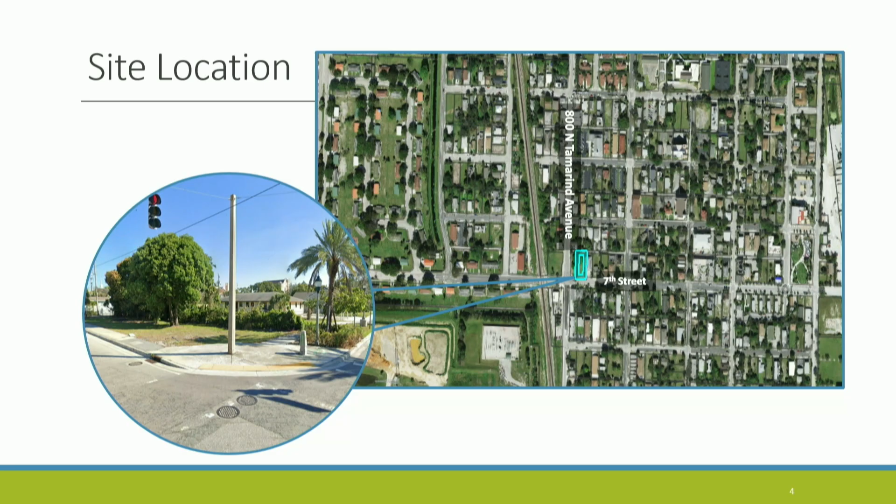The project site is located at the northeast corner of 800 North Tamarind and 7th Street. It's a 0.13 acre parcel in the downtown master plan with a land use of UCBD, and zoned in the Northwest Neighborhood District, more specifically NWD-5.

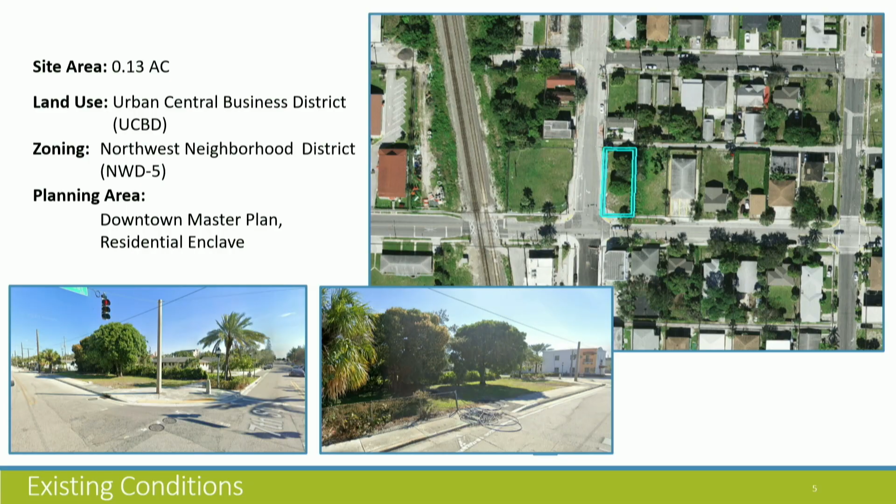The parcel itself is currently vacant. It is abutted on the east and west by vacant parcels, on the north by a single-story professional office building, and on the south by a 2-story building utilized by the City of West Palm Beach Police Athletic League. All of these parcels are also zoned in NWD-5.

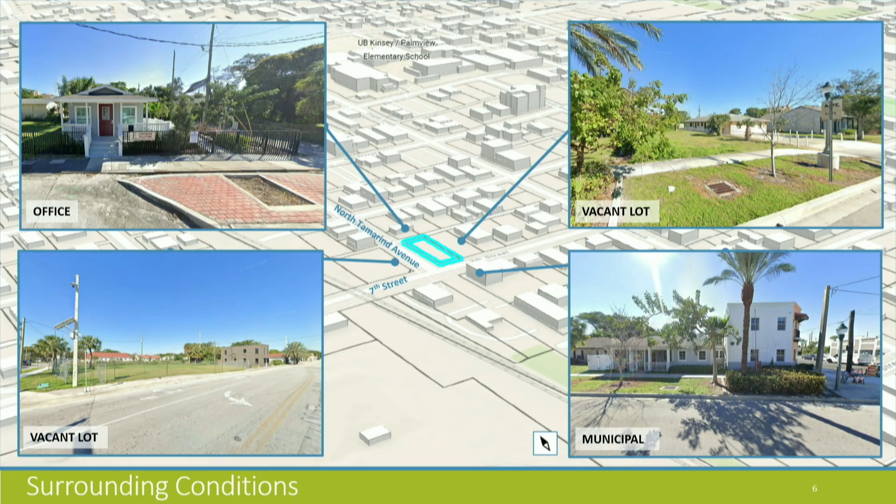The project is within the Northwest Neighborhood District, and based on Section 24-128 of the zoning code, the intent of this district is to preserve its historical character by providing appropriately scaled infill housing, enhancing the Tamarind Avenue corridor, improving neighborhood connectivity, promoting pedestrian activity, enhancing that streetscape feel, maintaining a low to medium scale and character, and being consistent with the historical architectural character of the area.

This project delivers on that by providing a 2-story mixed-use project appropriately scaled for the area. It adds additional residential units in the form of 6 studio-style micro-dwelling units, as well as 2,200 square feet of first-floor office and 3 tuck-under parking spaces on the north side of the building, screened from visibility from the right-of-ways.

This is the site plan and ground floor plan of the building. As you can see, we have those 3 tuck-under parking spaces accessed from the north alley. There is no additional curb cuts along Tamarind or 7th Street. The tan portion of the building is the finished office portion and back-of-house aspect of the building.

You can see that the streetscape is being enhanced through additional landscaping. We're also providing site furnishings in the form of bike racks—this plan is oriented north. In the southwest corner of the building there are 4 bike racks, and along the frontage on 7th we've got additional site furnishings in the form of a bench and trash receptacle, which really lends to activating that street frontage.

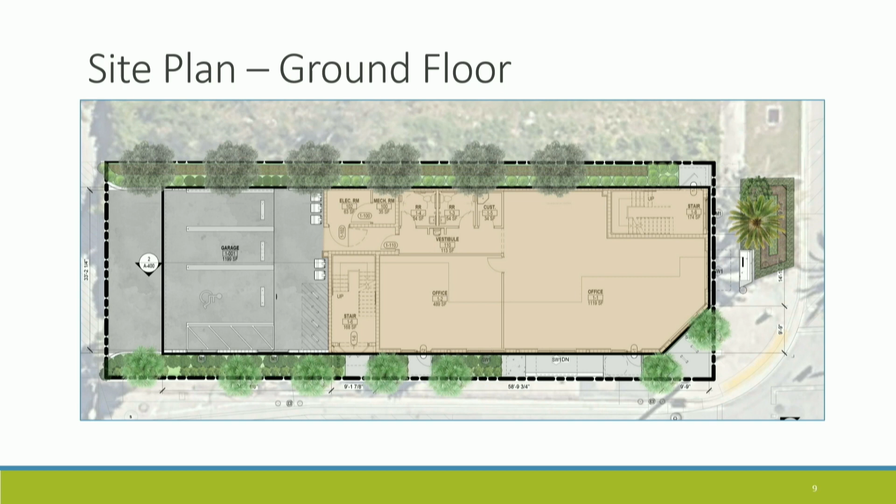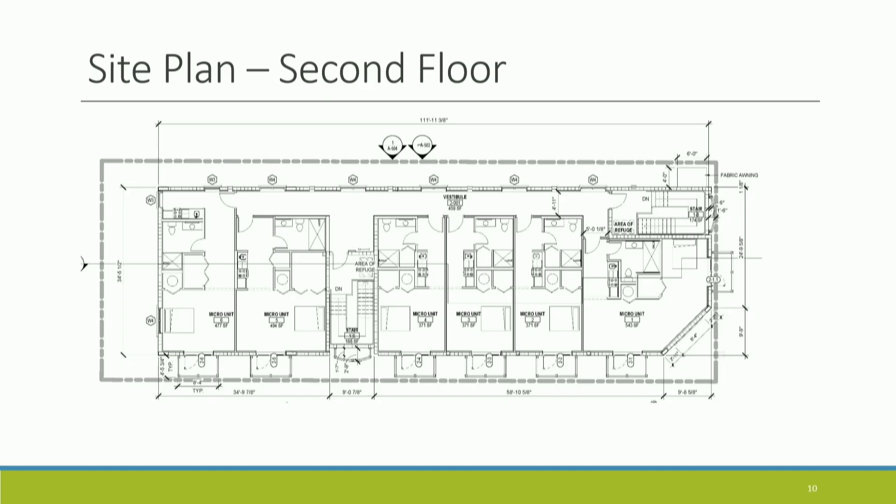This is the 2nd floor plan of the building, which reflects those 6 studio-style micro-dwelling units. The next 2 diagrams reflect the FAR calculations and active use liner for the building itself.

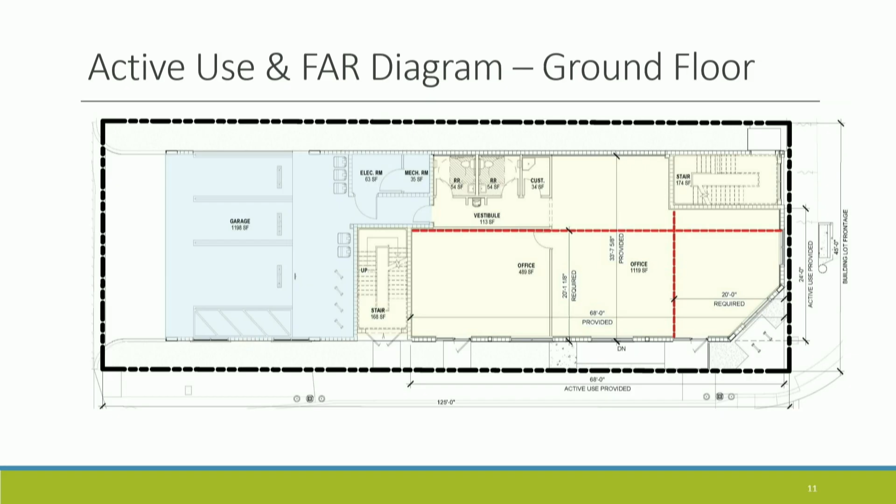The tan portion is what's calculated in the FAR. The Northwest Neighborhood District 5 allows for an FAR for a project site like this of 2.75. The project as currently proposed only proposes an FAR of 1, which is part of scaling this appropriately with the neighborhood and being consistent with that residential character.

The FAR, or active use liner requirements, will come into play a little bit with one of our variance requests, and I'll go over that in greater detail.

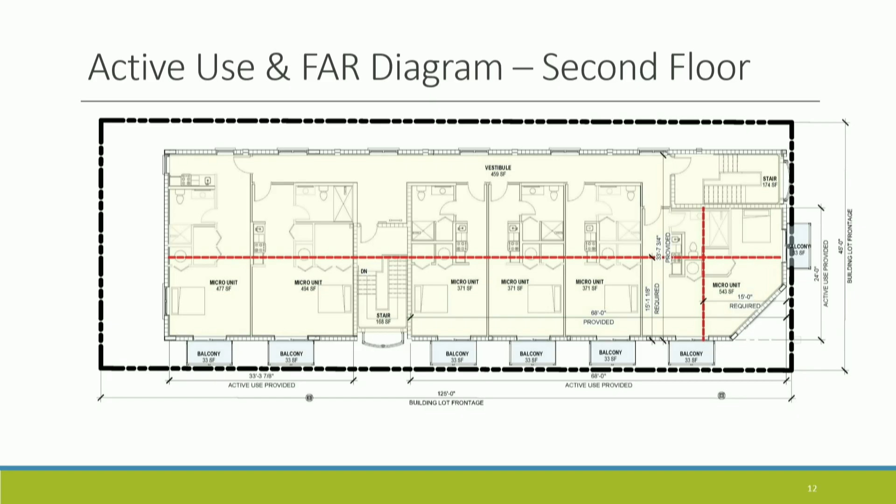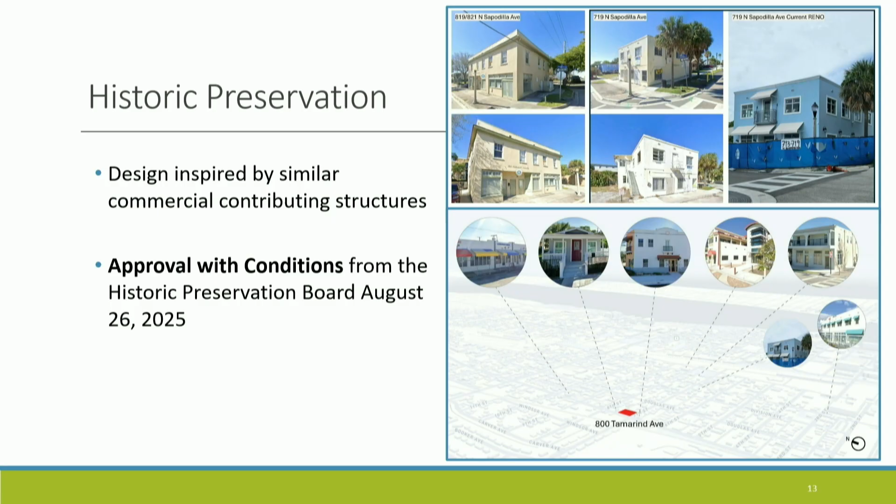This project had to go to the Historic Preservation Board and get reviewed in compliance with the architectural vernacular consistent with the neighborhood. Several contributing adjacent commercial buildings were utilized when evaluating the architectural style, and those are reflected here on this building. That review was approved August 26th of this year.

As you can see, the building utilizes a chamfered corner at the corner of Tamarind and 7th, has architectural banding to the north, a prominent parapet, balconies, and covered awnings to enhance and be consistent with that architectural style, with stucco finish, again being consistent with that architectural consistency of the area.

The streetscape, bringing the building up to the build-to lines as close as possible, providing site furnishings and landscaping in the form of foundation planting around the building, really activates that area and is consistent with the intent of the neighborhood district.

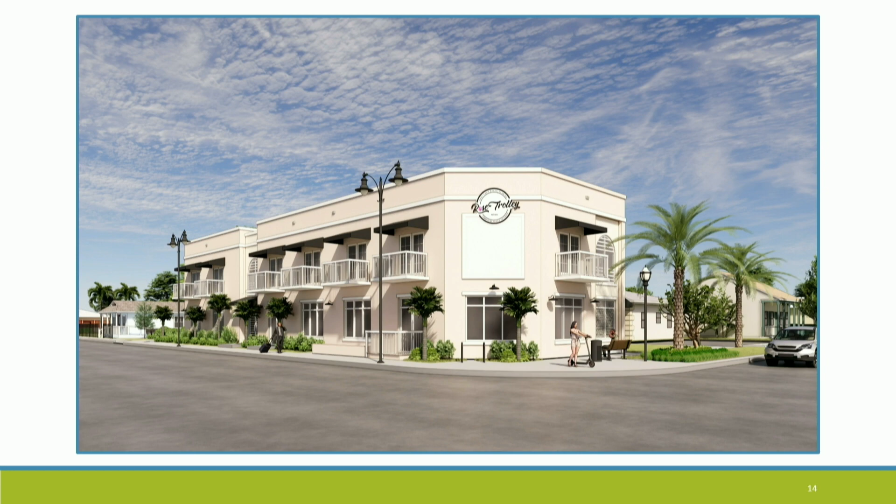This is an additional view of the building from the north. You can see in this angle the tuck-under parking accessed from the 15-foot alley on the north side, a two-way traffic route connecting Tamarind and Douglas.

Do you guys lose your visibility of this?

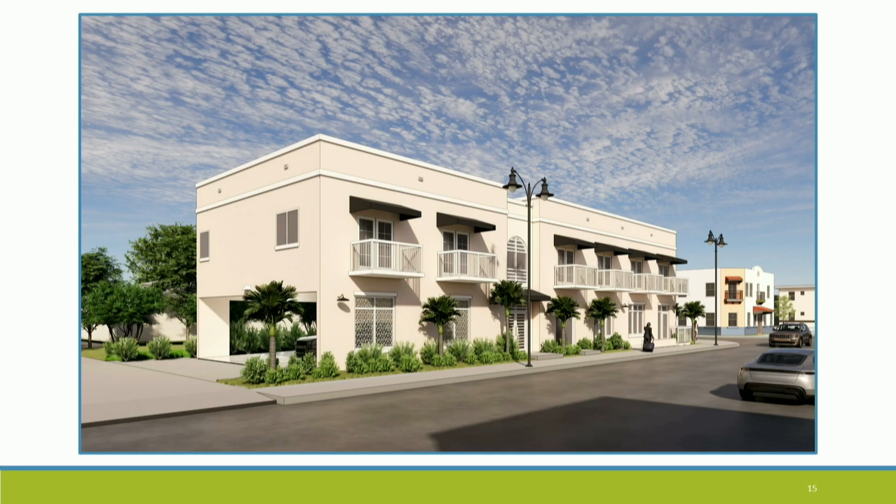So we'll quickly walk through the building elevations again, reflecting the architectural elements consistent with that historical style. On this frontage, the west face facing Tamarind, you can see that central stair tower in the middle, recessed into the architecture. One benefit is that it breaks up that long building facade, making it more consistent with the scale and appropriateness of this neighborhood district.

This is the eastern elevation, internal to our property rather than along one of the right-of-way frontages. While a landscape buffer isn't technically required on that side, we're utilizing that 5-foot setback to add additional landscape material to soften the building facade and the transition to our neighbor property.

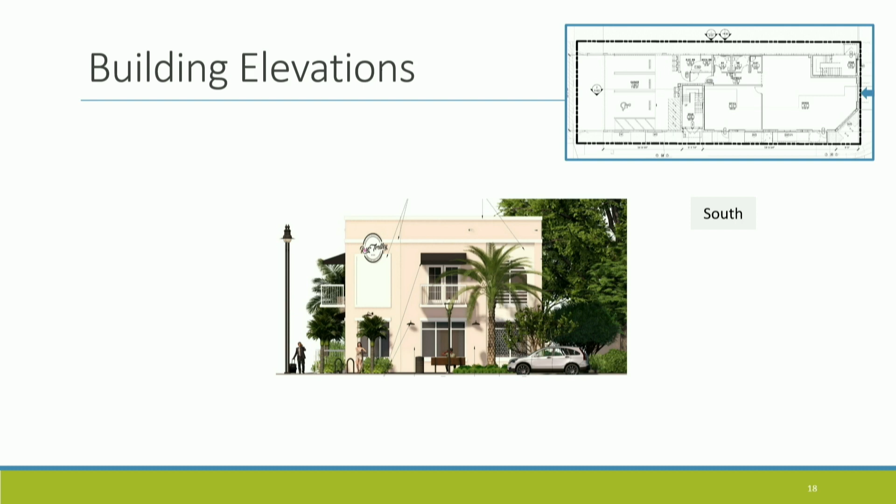This is the southern facade facing 7th Street. You can see the chamfered corner with architectural enhancement, along with site furnishings and the frontage of that office space on the first floor, which really activates this pedestrian condition.

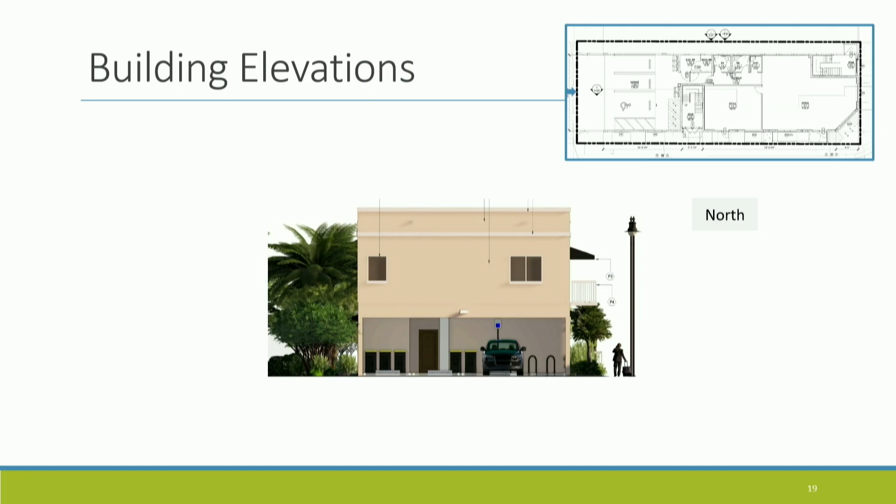This is the northern building elevation facing the alley. Again, you can see that tuck-under parking accessible from that alley to the north.

As part of the Historical Preservation Board presentation, we created enhanced, expanded elevations along the right-of-way frontages. This was intended to show consistency not only in the scale of the project but the architectural style to the community, driving home that we are consistent with the intent of the neighborhood district and the way the project is being designed.

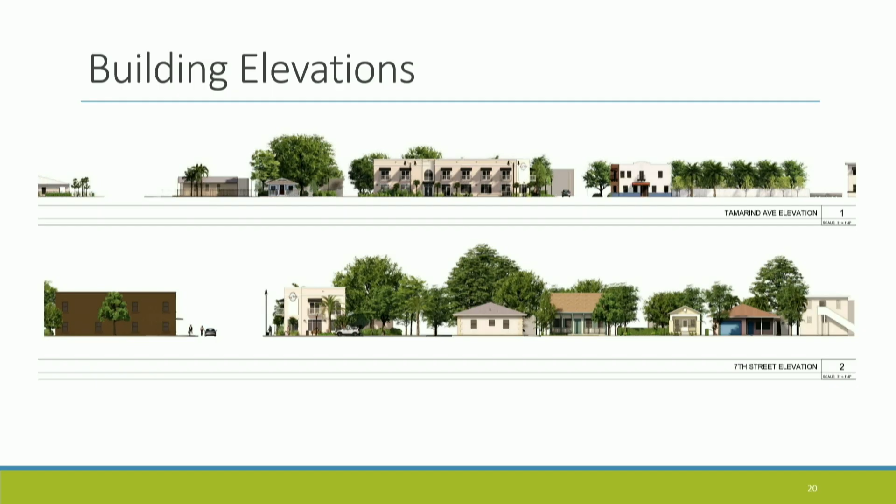These are slides referencing more detailed architectural elements. I'm not going to go into these in great detail, but if you have further questions, the architect is here to review that. Again, this was reviewed and approved through the Preservation Board.

So that brings us to the request before you today for your action, which is review of 4 variance requests proposed associated with this plan of development. A lot of these are really being driven by the physical constraints we run into with the site itself. The site's not very large—it's only 125 feet in length along Tamarind and 45 feet in width along 7th. That 45-foot width really reduces our ability to deliver on certain things.

Our first request has to do with the street tree requirement within the downtown master plan, which requires trees every 30 linear feet along the curb line. We met with staff multiple times to review a capital improvements project they already designed and approved for Tamarind Avenue, most specifically at the intersection of Tamarind and 7th. We had to ensure what we were designing was consistent with their approved plan to construct, including lane alignments, new curb line alignments, sidewalks being proposed, and underground utilities.

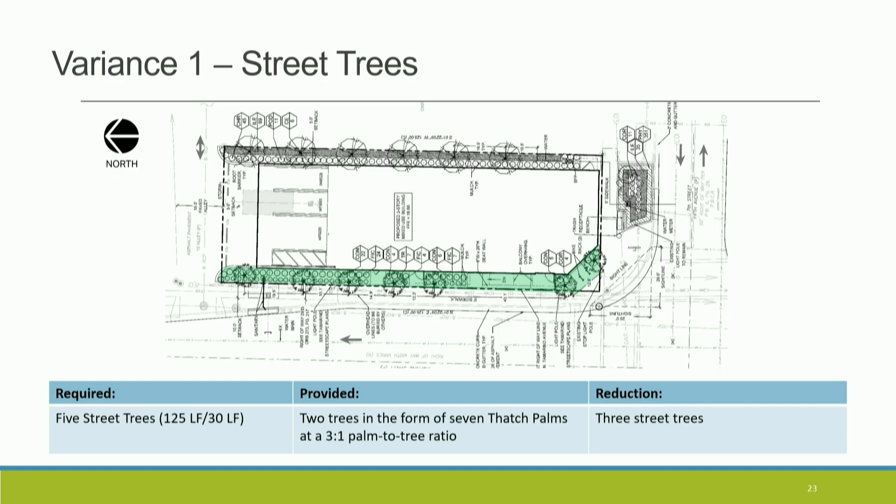Working with the city's landscape reviewer, it was determined that palm trees were the most appropriate selection along the streetscape. While we have 7 trees provided along that frontage, based on the city's requirement that 3 palm trees count as one canopy tree, we're technically only providing 2 street trees along that frontage. To make up for that, we're also proposing the landscape buffer within the setback on the east side of the building, with 6 trees provided on that side. So in total, the project site actually provides more trees than required by code, even though we're asking for this reduction in the street tree requirement.

The next two variance requests really have to do with the physical constraint of the site along with the requirements for the architectural design review with the HPB.

Because the site is so narrow, we had to design the parking to be accessed from this alley. We're not creating any new curb cuts. We didn't have the ability to provide parking at a 90-degree angle, either facing east or west, because we couldn't provide the backup space required for those parking dimensions. So to provide the parking, the required back-of-house access, and functionality of the site, we were limited in the amount of active use liner we could provide along Tamarind Avenue. We did maximize that as much as possible.

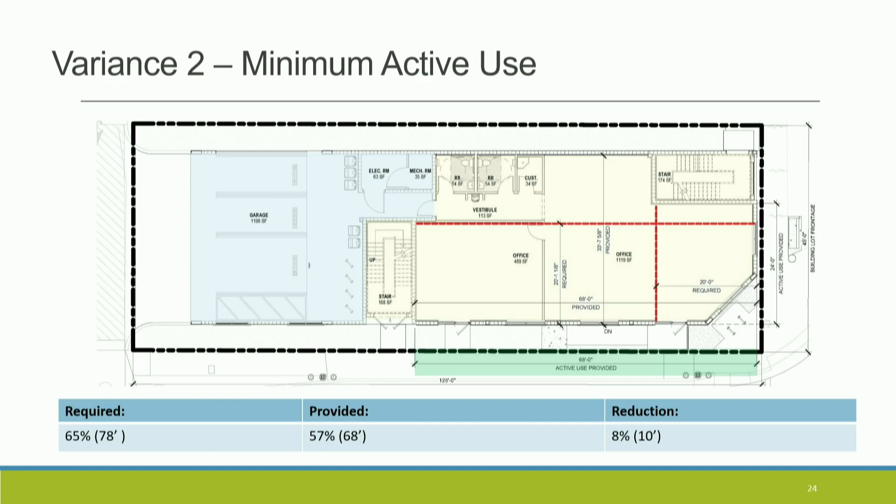You can see the stair tower just north of the office space. While it doesn't count as active use liner, it does have architectural elements, as you saw in the elevations of the building, that activate and enhance the streetscape experience that is part of the intent within the neighborhood district. So we are having to ask for a reduction or relief from that requirement.

The third variance has to do with the transparency requirement for active use elements along Tamarind Avenue. To be consistent with that architectural style, we had to have certain window and door dimensions, and to be consistent with that and get historic preservation approval, we weren't able to provide the required amount of transparency along that frontage. So we are asking for a 10% reduction in that requirement.

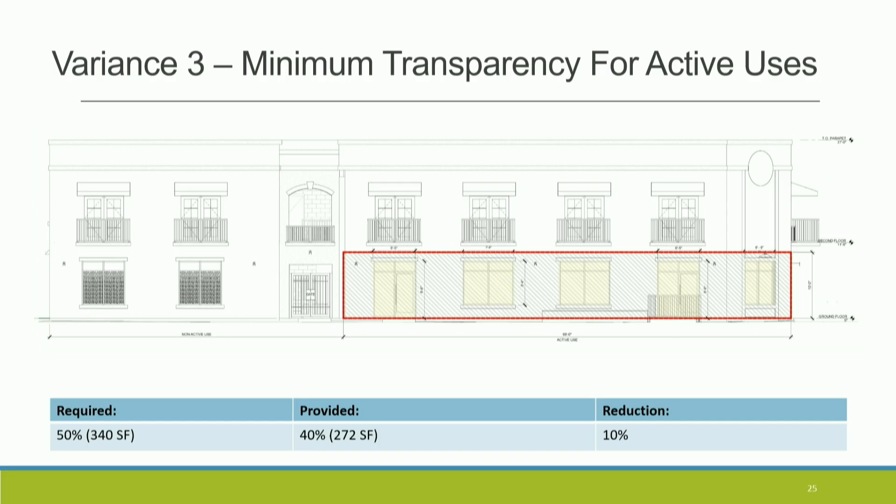Based on the physical constraints of the site, and as efficient as the architect was in making sure we could deliver a successful project for the CRA, we were only able to deliver 3 parking spaces, so that is a request for a reduction of 1 space.

We feel this variance is requested based on the smaller unit types. It is anticipated that vehicle ownership is reduced with these particular types of units. The project itself is located adjacent to public transportation stops, within walkable distance to the Brightline. Additionally, we are providing 12 bicycle parking spaces on the project, 8 within the covered parking area, and 4, as mentioned previously, along the frontage on 7th. So we are adding additional mobility items that should allow for proper parking and mobility for this project.

City staff has reviewed our request and found that we are in compliance with the review standards for variances. They are recommending approval of our variance requests along with a condition of approval. The applicant has reviewed and is in agreement with that proposed condition. And that concludes our presentation.

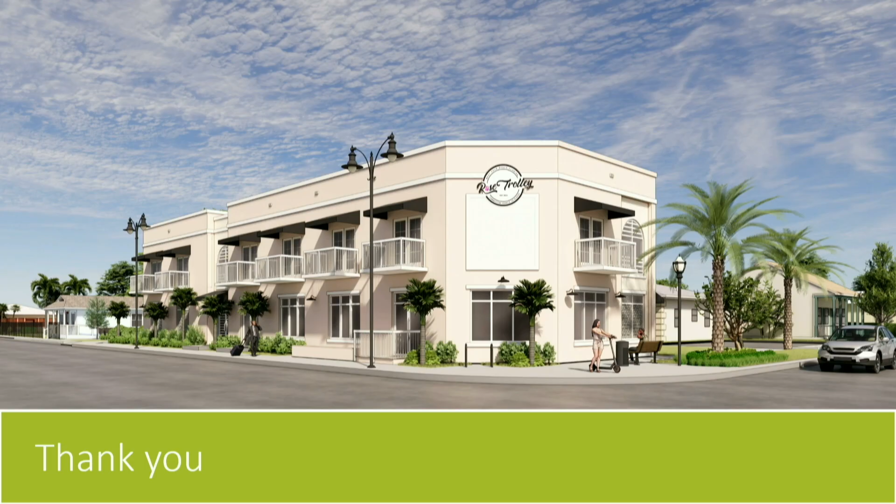Actually, let me back up and say, was there any architectural commentary from the historic presentation? I know it was approved. Renee Johnley from Song & Associates. That corner would just be a statement piece as how the Rose Trolleys would like to use that space, but it could represent an area for future signage that would have to be approved separately.

Okay, it just seems a little harsh right now. Maybe, if the sign isn't going to be there, 1 or 2 windows in the middle might be better for that unit for natural daylight and be a more neighborly gesture to the street corner versus the blank white wall. Either consider that, or maybe the signage drops down as the focal point. It just seems a little odd that the signage is crammed in between the parapet and that white blank space.

And then secondly, a bit of a landscape question too. In this image, is that cheek wall on the west side of the building for a ramp? Yes, it is. Is there any way to put low planting adjacent to it between the sidewalk and the wall? It's a little harsh, right up against the sidewalk, so there's no space for landscaping? There's only 5 feet of clear sidewalk outside of that wall. We are really tight. Based on the improvements proposed along Tamarind Avenue, we were really restricted on the amount of space.

Is it the same on the south side where the building meets the sidewalk? Is there any room for a strip of green there? Not adjacent to the building. What we're doing is utilizing an existing planting area with trees, as you can see here. This is existing right here. We are enhancing the understory aspect of that, and we don't have enough space between the building and the existing edge of that landscape area to add additional landscape adjacent to the building.

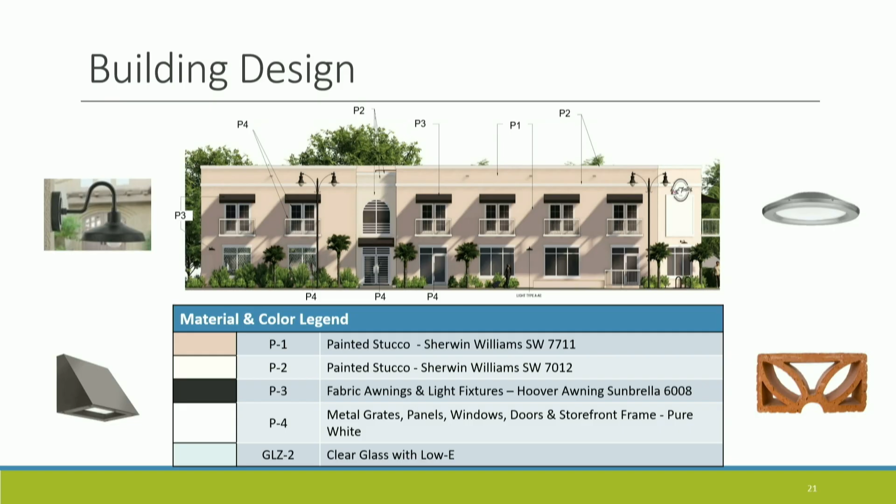So they will match. Do you have an image of that? That shows it best, yeah. Is that those two openings into the garage on the west side? Yes, these two openings here have that perforated metal.

So it's white aluminum grillwork that emulates the breeze block. Correct. That's interesting. I don't know the procedure here—if it's been to historic and already approved, does our commentary on the architecture create a problem? Because it's a little backwards.

I think you both have separate jurisdictions. So I guess these could be considerations, and if they wanted to take it, they'd have to go back to historic and make a modification through staff. Could it be an administrative approval?

Any considerations you'd like us to bring to historic staff, based on what was approved and the conditions they've posted on this? We can definitely do so, but historic does trump our code. I got you. Yeah, these would all just be recommendations, whether they take it or leave it, right?

I think I agree with Brian that the breeze block concept in those openings of the open stairwells might be a more interesting and appropriate treatment than those horizontal bars, that's all. And I'd get rid of the arch, but that's just my opinion.

And Roger, I agree with you on the hard corner in terms of the signage—that looks like a blank white wall. I think just trying to understand what that would look like once new signage comes in, or moving Rose Trolley down a bit.

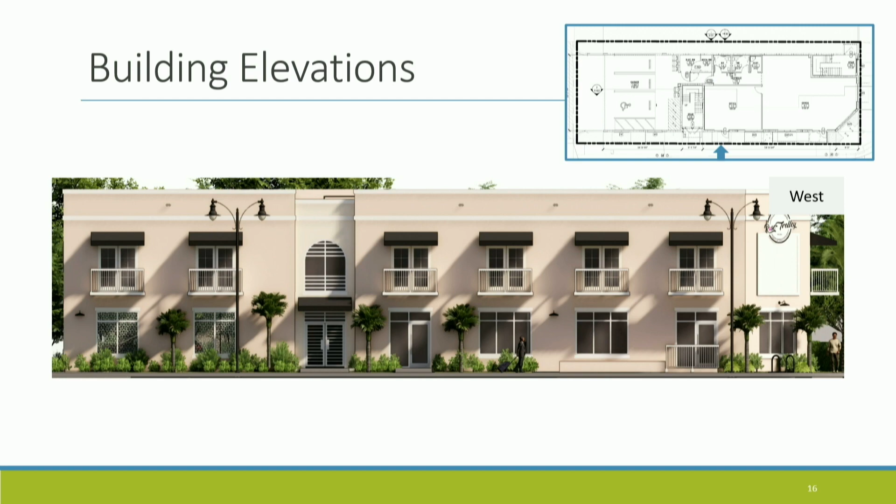Yeah, I wasn't sure if they were trying to brand maybe the micro units—that's why it was blank. So I don't know, maybe they just haven't given us the brand. I know they haven't given us the branding yet because I was on the call. So maybe that has something to do with it, but I don't know.

Well, maybe once that's resolved, you guys could revisit the design of that wall. Anyways, all right, so there you have it—that's our thoughts. I think the rest of it looks excellent. It'd be a nice infill for that whole intersection there, so appreciate your efforts.

One other question about the east side of the building, that facade—can you pull that up for a second? So you have the screening where the parking is, and then you have all these windows into the micro units. That's a hallway, that's the circulation. Except for the one on the very right, that is into a unit.

And the future build out of that lot next door is the same massing, right? So it could be a 5-foot setback and openings, correct? Yeah. Okay, that makes sense.

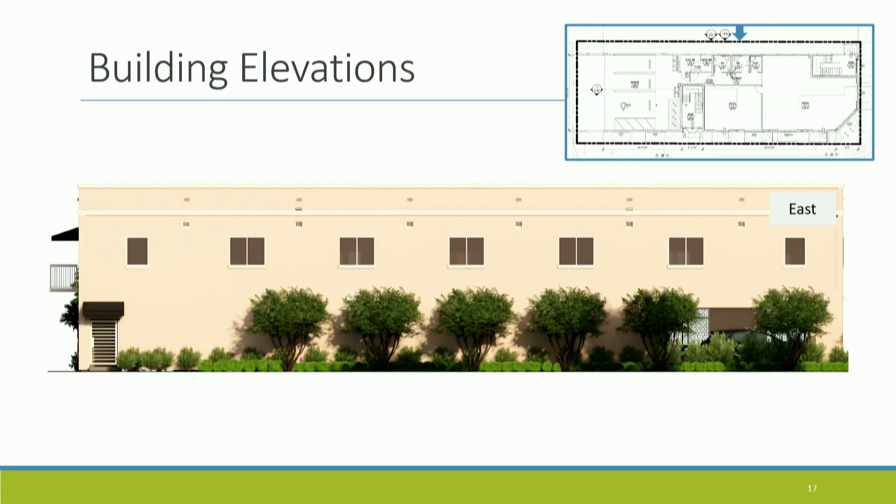Okay, unless there's any more discussion, anyone make a motion for this one? Veronica? I'll make the motion to move. I second—move to approve.

Discussion—anyone want to add consideration for the architectural recommendations we discussed? So we're going to move for approval of all 4 variances? Yep. Okay, and so probably we should vote on them separately, I would say. Okay, 1, 2, 3, and 4, just because they are separate, with separate conditions. Sure, there we go.

All right, Veronica, now you got to do them all. What?

Okay, that's fine, as long as she's... it's fine. You can do it that way. You can do it that way.

So the motion, you want to restate the motion, Veronica, please? Perfect. I move that, sorry, can you hear me?

I move that the Downtown Action Committee approve the variance request included in DAC case number 24-04 as follows. Variance 1, a variance request from section 94-113, subsection D2, regarding the installation of street trees at a maximum of 30 feet on center along North Tamarind Avenue, a reduction of 3 trees from the 5 required. Variance 2, a variance request from section 94-128, table

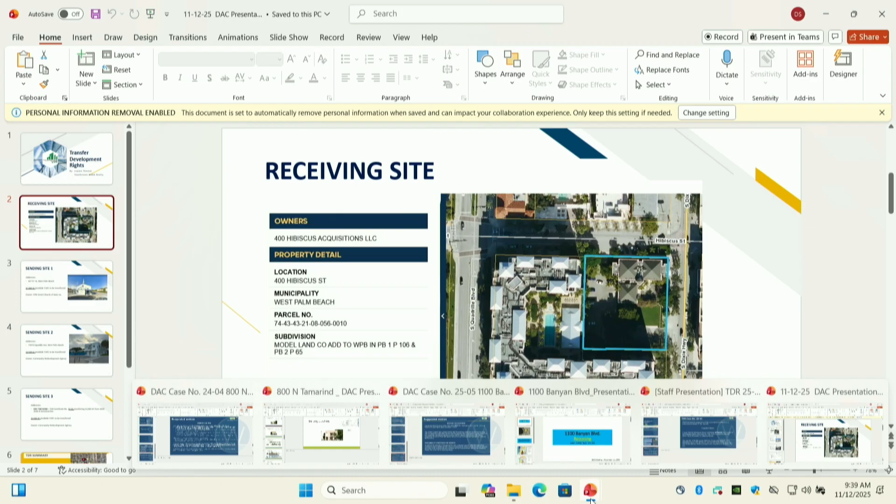Okay, that's great. Thank you very much, Lauren. Any comments from staff? Chris? I will be very brief. Yes, Chris Kimmerly, Senior Urban Designer.

As you heard the request, it is the transfer from these three sites. The 627 5th Street sending site, you might be familiar with, as DAC did approve a transfer from this property once before under TDR case 2209. This was when it was transferred to the Fern Street project when it was originally a 25-story building. The plans have since changed; they went down to an 8-story mid-rise, and thus that transfer was canceled and not recorded. So we are now retransferring those TDRs.

719 North Sapodilla has just finished its renovations. The restaurant should be opening soon, and it's a little market as well, so definitely check that out. And then the CRA TDR Bank did receive TDRs from TDR case 2401, and they are just transferring that now from the bank to this property. Staff recommends approval of this TDR transfer as it does comply with all standards of section 94-132.

Assuming that everything has been met, it's typical procedures, nothing out of the ordinary on this case? Yep, they're just banking it on the site, and as mentioned, we don't quite have a site plan yet for that 400 Hibiscus property, so when it does come in, we'll likely come across this board.

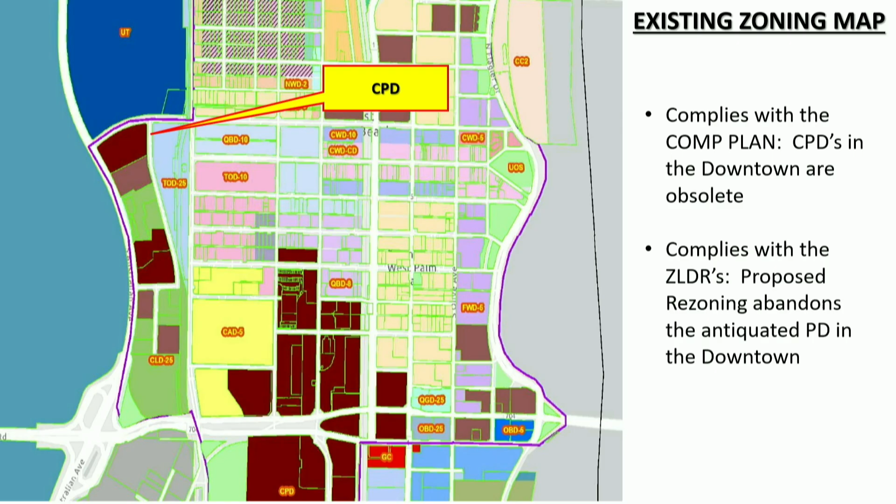You may know that CPDs are now obsolete within the DMP, the downtown. So we're bringing the parcel up to code and rezoning it to a consistent zoning district. Specifically, the site is zoned CPD currently, which is a commercial planned development, and we are looking to rezone it to CLD 25, which is consistent with the adjacent properties. It's the Clear Lake District 25. It's also consistent with the comp plan.

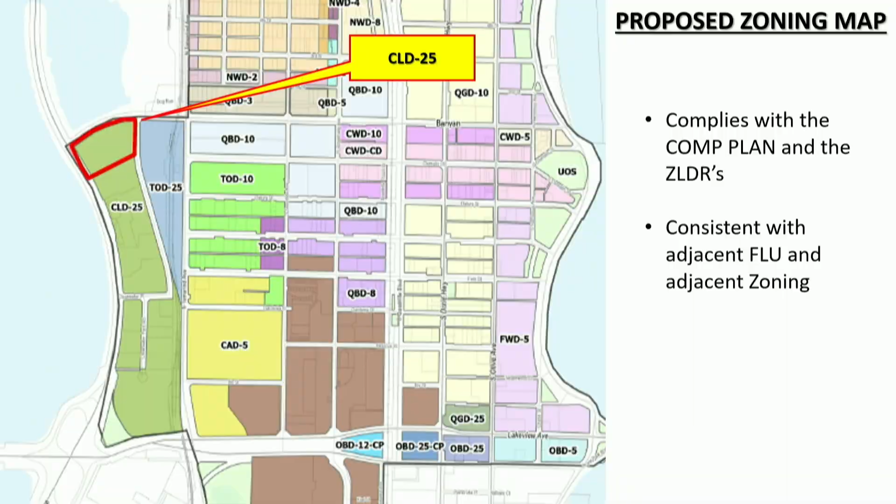For rezonings, we do have to comply with the standards as stated under Section 9432A. We believe we comply with all the standards. Staff concurs, and with that we do ask that you recommend approval. Staff is asking us to work with them with a condition of approval as it relates to some traffic counts required prior to scheduling for City Commission. With that, we respectfully ask for your recommendation of approval on this rezoning.

Okay, great, thanks. We'll hear from staff on this one. Again, for the record, Claudia Baben, City Urban Designer.

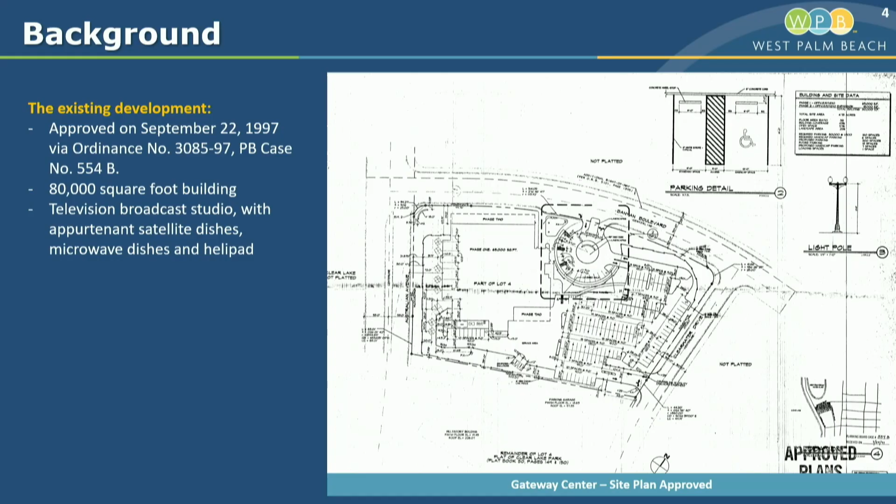I'm sure many of you are familiar with what is there. We have satellite dishes and a helipad on site. And the city has really left the property owner to keep the planned development or abandon the planned development. That is their choice.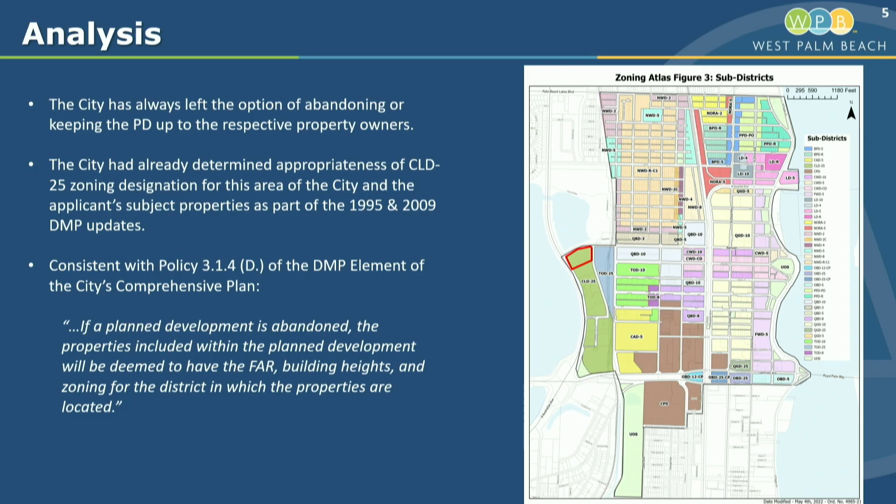We know that this area is already included in the downtown master plan and it was already evaluated what kind of regulations were supposed to apply for this particular site. Even in the comprehensive plan, policy 3.1.4 calls out that if a planned development is abandoned, it will need to comply with the DMP regulations, which is what will happen right now with your approval. Now, a rezoning is typically accompanied by a site plan or an actual proposed development.

At this time, the applicant is not proposing anything yet. So what the departments are reviewing is basically the maximum development capacity that can happen on this site. Before we had 80,000 square feet of building, but with the new Clear Lake District, which has the highest FAR of 7, it might be 1 million square feet of development. So the different departments are reviewing what impacts that can have on the infrastructure in the actual area, which is one of the conditions they're still working on.

Prior to any city commission hearing associated with the proposed rezoning, the applicant is to provide a trip generation analysis for two scenarios: one being the maximum permitted under the existing planned development, and the other being the maximum permitted under the future zoning, which will be the Clear Lake District 25. Any future development that comes to this site will go through the process as any other site plan development. It will most likely come to you for approval and will have to comply with all the zoning regulations and the DMP regulations.

So we have reviewed it against the standards that the applicant already mentioned, and we do recommend approval with the same condition that I already stated. And if you have any questions, please let me know.